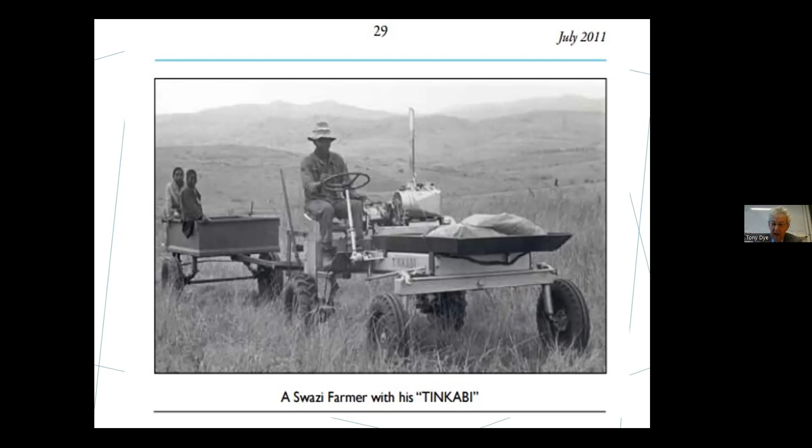Yes, okay. That's the two-cylinder air-cooled diesel engine from Kirloskar in India. It produces about 15, 16 kilowatts. But what I thought of it at the time was, well, it's a massive lump of steel and technology. Is there possibly a simpler way in which you could produce 15 kilowatts to power mechanization of small farms throughout the third world? And I started thinking in terms of three-dimensional shapes.

And what I came up with, you may be able to see on this screen, through the transparent wall, you can see two rotors, a two-lobed rotor on the left and a three-pocketed rotor on the right, so that the lobes and the pockets can interact. And the two shafts are geared together with timing gears that preserve the correct angular relationship between them.

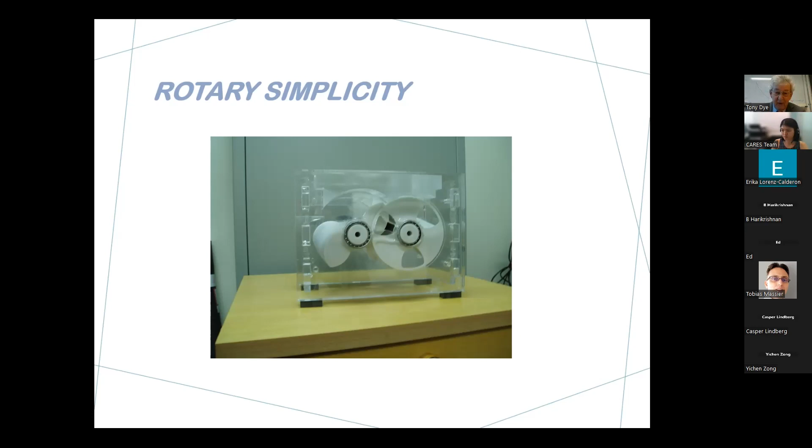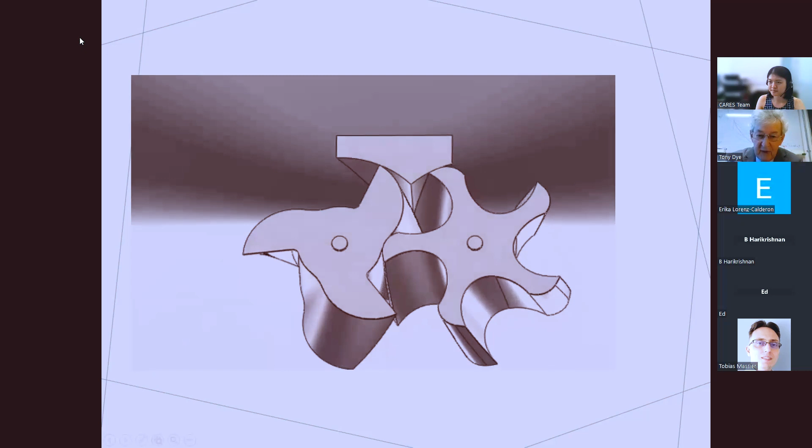And what I will show you now is the means by which compression and expansion are achieved with this type of device. It's a complete compression cycle. And here's the second one now starting to operate. You have to imagine these rotors are mounted in the housing with close-fitting walls at front and rear, but not actually making contact with those walls. So the rotors are able to rotate without making contact, and therefore the compression takes place without any internal mechanical friction. So that demonstrates compression.

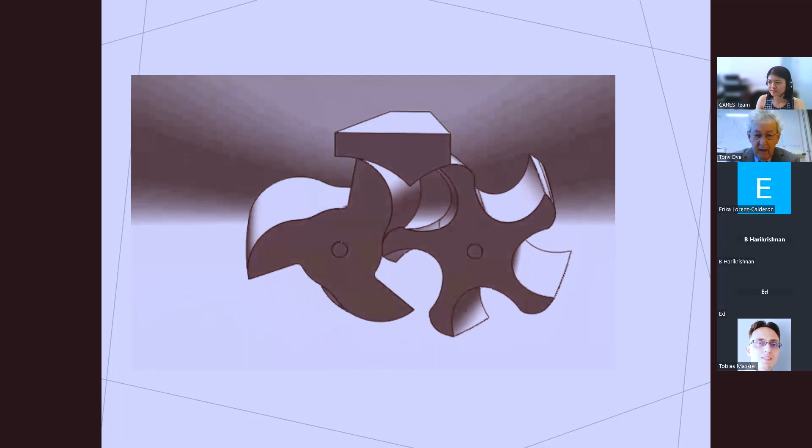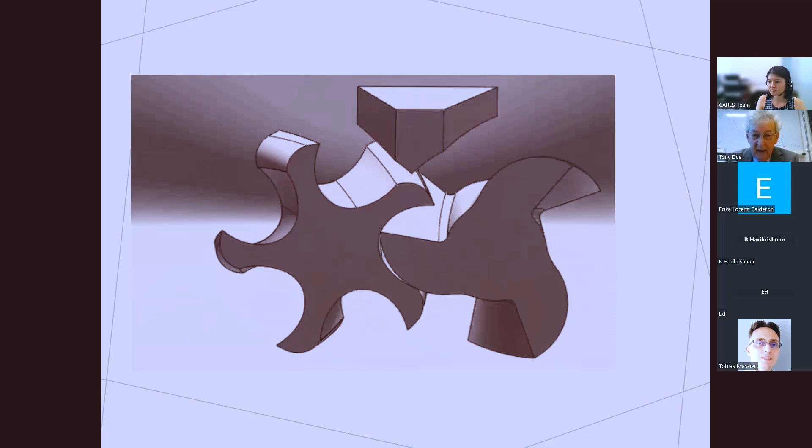Of course, I can't show you the porting that allows the delivery of the compressed air to whatever receiver is available, and how the air would get into the housing which houses both the rotors. So what they're doing really is just swimming in working fluid. If I can, I might be able to rotate it backwards so you can see the effect of expansion. Let's see if we can do that. No, we're not able to do that. Anyway,

if you can imagine it, the process is exactly the reverse of what you've just seen. As the rotors counter-rotate, a small new transient chamber is formed, which expands as the rotors counter-rotate. And one can look at a very high expansion ratio. We think in terms of 400 to 1 for quite a small size of machine.

Can we just go back one? Yep. Oh, yep, no problem. Right.

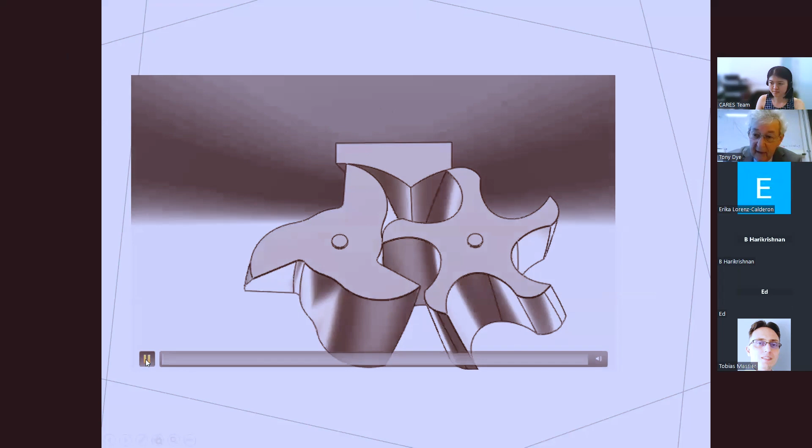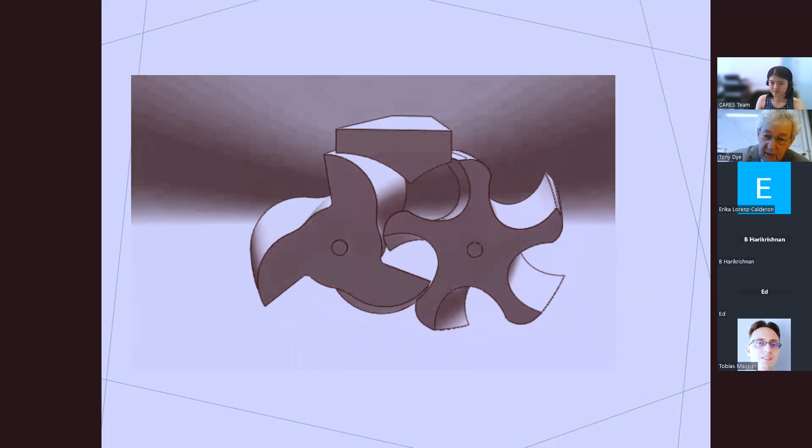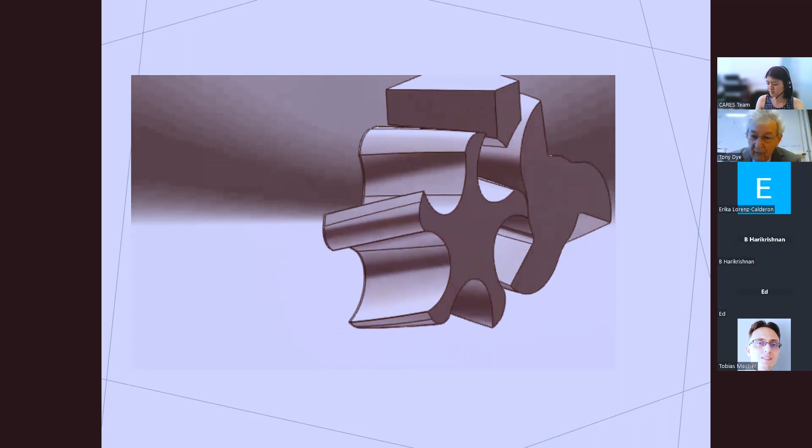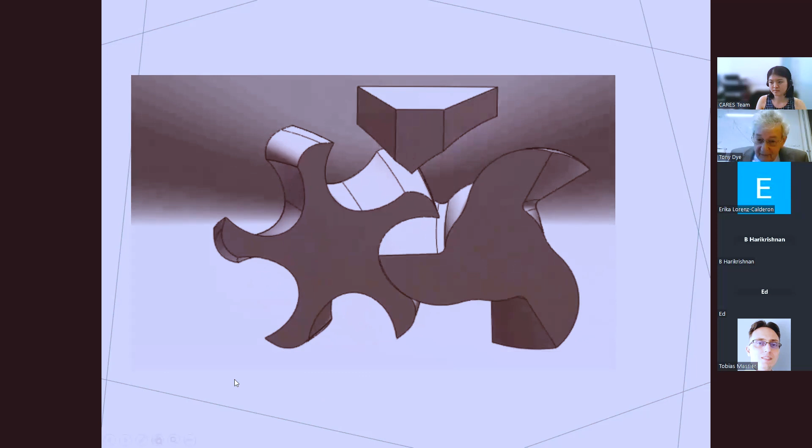At this stage, this was just a concept, and I realized that you could have two devices, one compressor and one expander with connection on the same shafts, put a combustion system between the two, and you would have an internal combustion engine with potentially world-beating characteristics. So at that point, I realized I could do nothing because I had no funding and I had no patent protection. So I couldn't even talk to anybody about this.

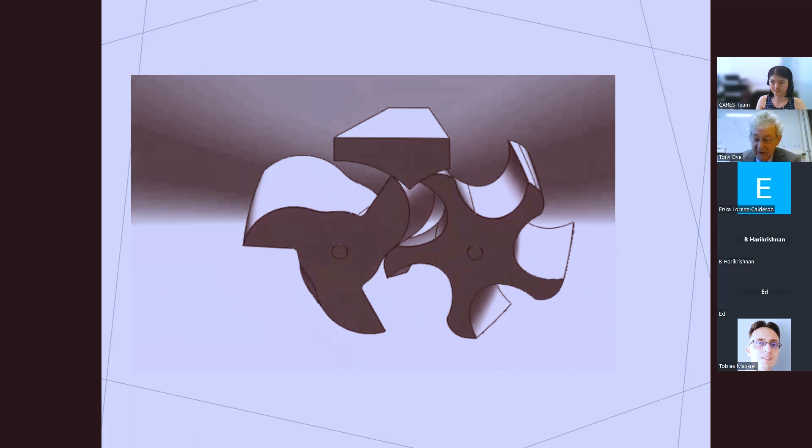So what I then did was to turn my attention to the auto industry. I thought if I could learn something about how the auto industry works and how it might be possible to introduce technology into it. Okay, so I'd like to move on now.

Could we move to the next screen? Okay, whoops.

What I did was I got a Ford Anglia car, heavily modified the engine to run on 2 cylinders instead of 4, and used the 2 center cylinders for double expansion, and to recover the heat from the exhaust and introduce it as superheated water.

And I took this car down to my friend in Wiltshire, where I'd done my practical work on the farm, and he gave it a test on the road, came back and said, yes, you know what you're talking about, I'll fund you. And the result was that I then had a dynamometer, an engine dynamometer, so I could do engine testing, and some electronic equipment to monitor cylinder pressures.

The idea of recapturing the exhaust heat was not easy to actually turn into practical use. But I then discovered a process that was happening in conventional gasoline-powered engines known as intercyclic combustion variation. You've probably ridden in a petrol engine car, and if you're driving along at 60 miles an hour on a level road, every other time the pistons go up and down you're going to get a combustion event, and the pressure will shoot up to a maximum and come down again.

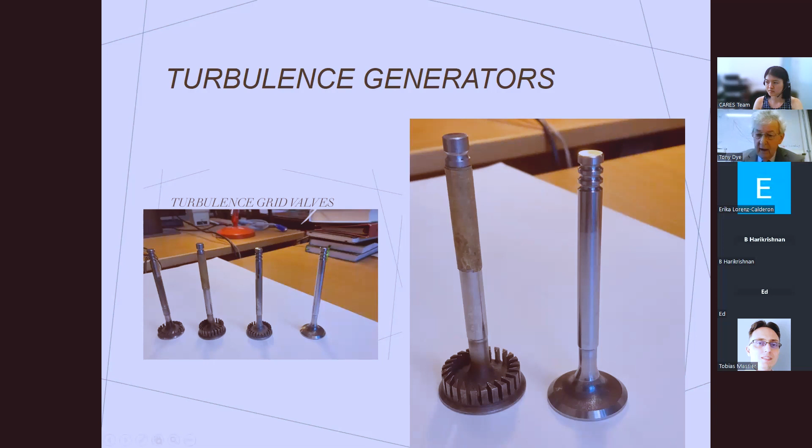And engineers had been trying to fit functions to this to define, well, what is it that's causing it? There must be, no, there's no function at all that fits. It's a completely random walk. And that's because it's caused by turbulence. And if you don't control the turbulence, then you don't have very good control of combustion.

What I then was able to do was to work with Ricardo's, the consulting engineers to the auto industry. They liked this and set up a test. They bought a car, drove it for 1,000 miles, put it through the test rig, and threw the book at it. And they said, right, we've got everything that we need to know about the performance of this engine. Come and put your modified cylinder head on it, and we rerun it.

And when they reran it, they said at the end, well, you've got 20% reduction in fuel consumption. You've lost some power, but it still has the same power as the 2-liter version of this 2.5-liter engine. So it's virtually adaptable. And you've got emissions like we've never seen before. And we were able to show that it's possible to lean the fuel-air mixture to a point where there's no further nitrogen oxide emissions formed.

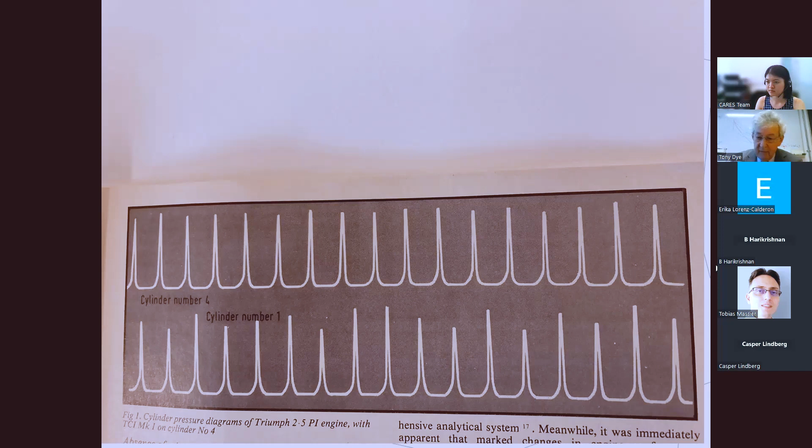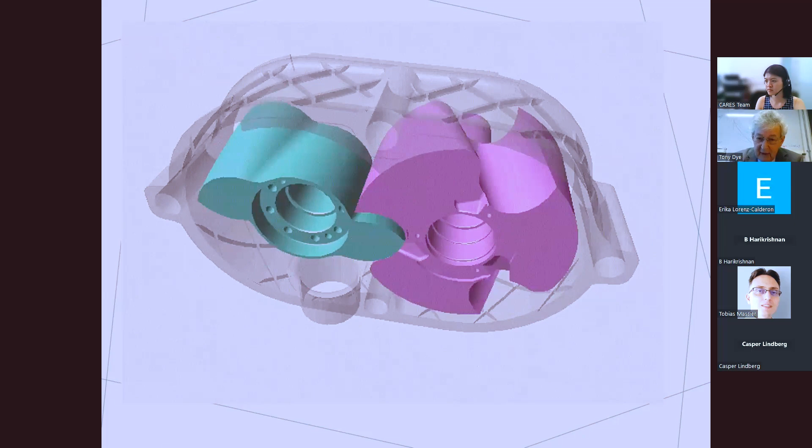Oh yes. What we did was first to build a compressor, and this was able to attract the attention of two successful entrepreneurs from Belgium, Karel Bos and Ton Coat, and they funded the development with eventually £2.5 million to build an engine. They wanted to see a new IC engine, and that is what we did. We built the engine.

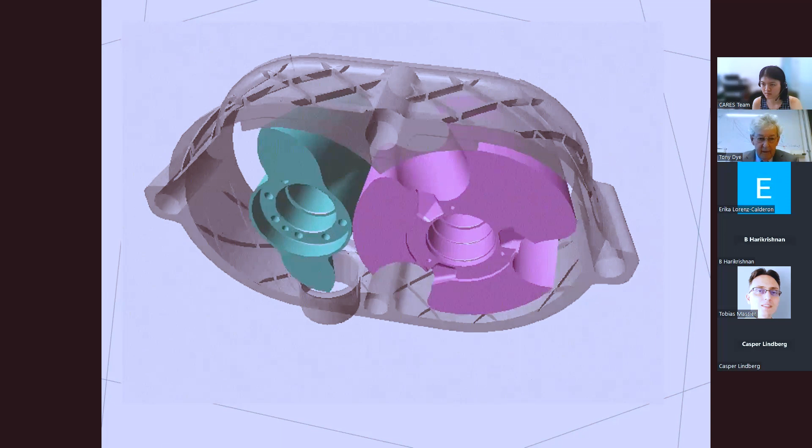I can't get it to move on. Can we move it on? Yeah, whoops, too far. That's it.

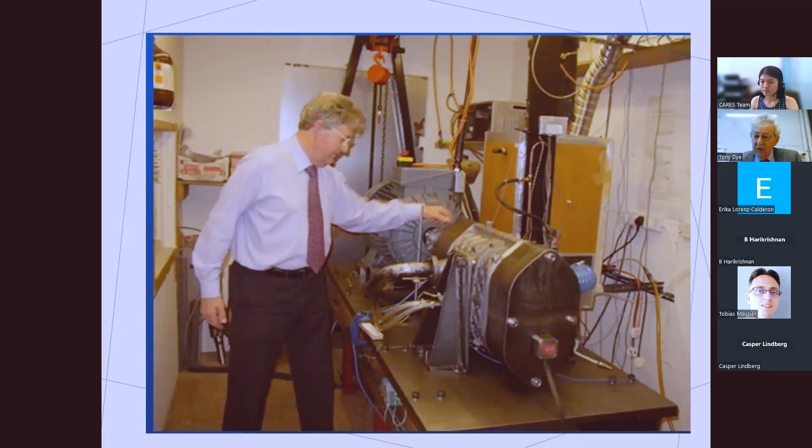Here is the engine which we built, and it's on its test rig in our facility, which was then a small unit on an industrial estate. And you see that within this casing here, you have the gear wheels at this end, which time the rotors. The compressor is on this side. The combustion system is in the center, and there's access to the spark plugs on the other side. You can't see that. And behind is the expander with the exhaust pipe coming out here. And what's going on inside here is shown on the next slide.

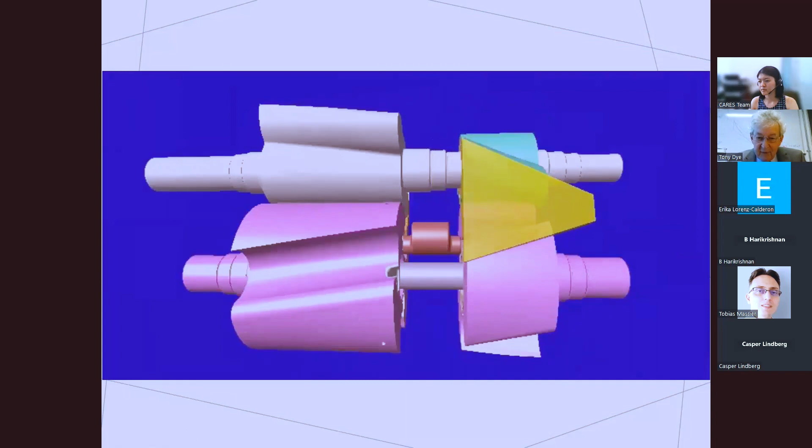Now, can we animate this one? Yes, we can. And now you're looking at the compressor end. So the compressor rotors are delivering compressed air into the chamber, which is the brown cylinder in the center there between the two sets of rotors. And the expansion takes place in the expansion rotors here. And you'll see they're twice as long as the compression rotors, because when you combust a fuel air mixture, it wants to expand by twice its original volume.

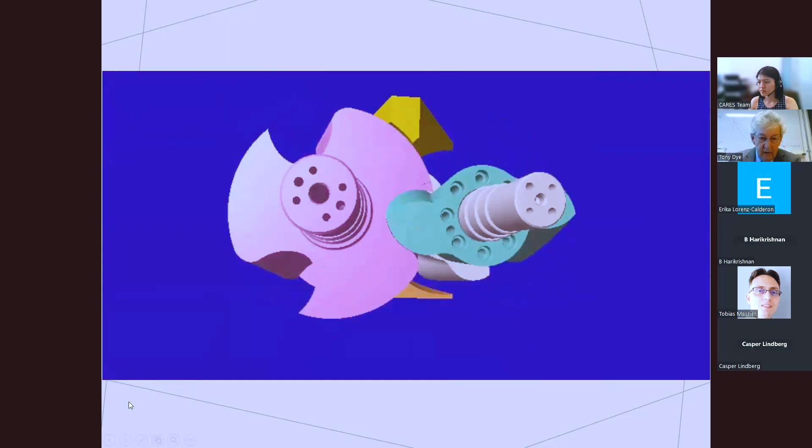Right. So let's not go on. Can we go back? Right, let's just hold it there for a moment.

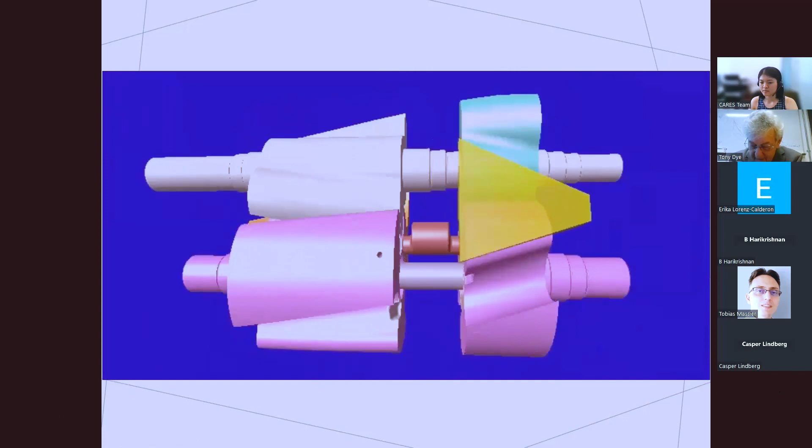What we were able to do then was to demonstrate this engine to Rolls-Royce and General Electric. We're now talking in 2003. We started contact with those two organizations, and they were at first ecstatic. I mean, we had to kind of scrape them off the ceilings and get their feet on the floor to start sensible discussions. And the discussions and negotiations then went on for a year. And they were saying, look, Tony, you've shown us the most efficient and effective way to convert fuel energy to shaft power that we have yet seen. And they didn't have any doubt about that.

But at the end of a year of discussions, they were both saying the same thing to me, which was like, Tony, nobody but nobody is going to build your engine. And it's not because we don't believe it. It does what it says on the can. It will achieve what you're looking for. But it would also destroy Rolls-Royce. And I don't know what it would do to General Electric.

What they then said was, look, you've got the best way to compress gases, including air, of course. Air is a gas, yes. To compress and expand, you have the best way of doing it, with no internal friction, mechanical friction, and opportunity for very efficient compression and expansion. What you've got to do then is to look for an application where you don't immediately get into industrial disruption on a massive scale.

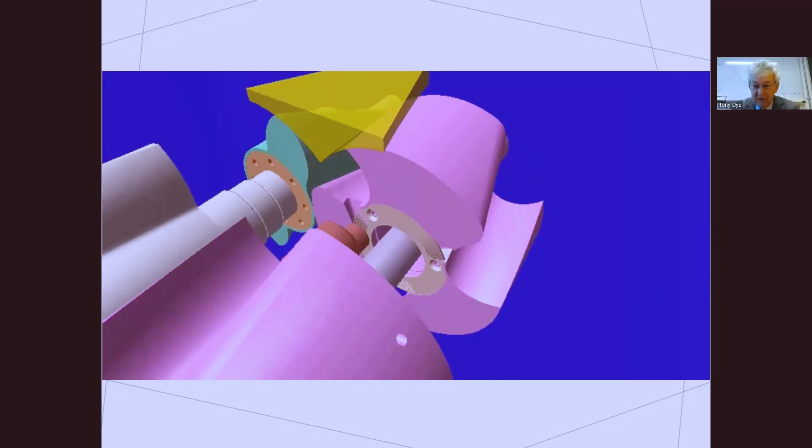So I worked for a few years with Valeo, the French company. We designed a compressor for supercharging their downsized petrol engine, which very nearly went into production. But just as it was about to do that, I received the invitation, this was then 2014, to visit Highview

Power. Highview Power was a spin-out from Leeds University, where there was a cryogenics laboratory, and they had been experimenting with liquid air and realized that it takes a lot of energy to make liquid air. So therefore, it could be used as an energy storage medium. And their first plant was demonstrating the process on an industrial estate at Slough. And I was invited down to visit, and when I saw it, I very quickly realized this is the opportunity that we have.

Highview had decided to commercialize this technology and use for compression and expansion, and it is really only compression and expansion of air, turbo machinery, which had the advantage for them that they realized they were introducing to industry a new technology, and one with which industrialists were pretty well unfamiliar.

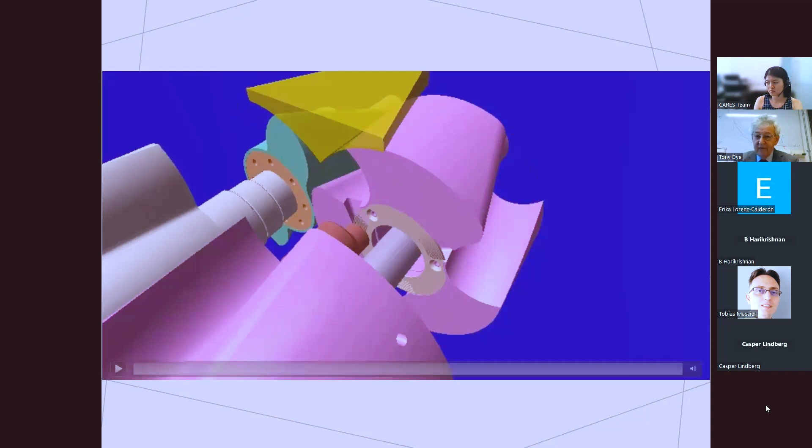Let's see if we can move on. So what we had to do was to first design a system for delivering liquid air. And the way we did it was, as you've seen on the screen. Can you see this? Yes. Okay.

So we have power input on the left-hand side of the screen with four electric motors driving 4 power lines, each of them having a direct drive to successively 3 compressors. The first stage compressor takes the air up to about 4.5 bar. It then goes through a heat exchanger because we want to recover the heat. The heat there is at about 450 degrees K.

So the heat is stored, and the charge then goes to the second stage compressor, which will also go up by about 4 times to 20 bar. Again, heat exchange, and third stage, another 4 times, takes you up to 80 bar. So the object is to get compression of air up to 80 bar.

And then what you've to realize is that the lower 3 power lines are required in order to provide the cooling for the fourth charge, which is in the number 1 power line. So what you do is to put the air at 80 bar and ambient temperature through an expander down to ambient pressure. The cooling is subsequently through heat exchangers submitted to the air which is compressed from number 1 power

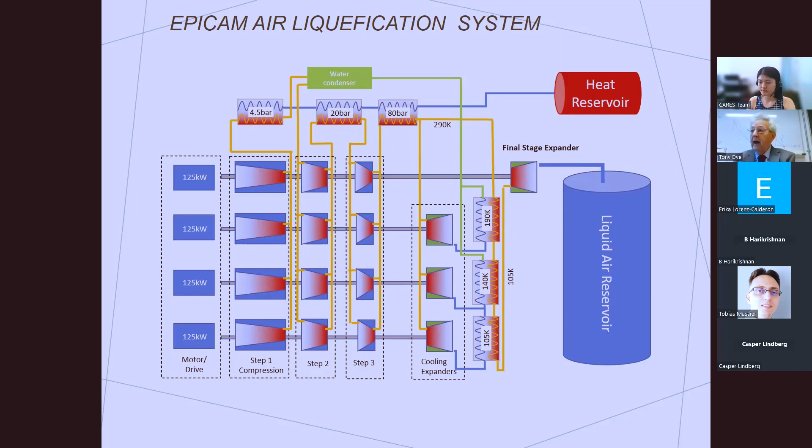and we then go on to expand it. And I have to apologize for the rudimentary nature of this diagram, but at least it illustrates the elements. So we have 2 energy storage elements. One is the cold one at 75 degrees K, and the other is the hot one at about 450 degrees K. The cold liquid air from the reservoir is introduced into a small bore pipe, which is assisted with a high pressure pump through heat exchangers to an injector in the expansion engine.

So what it means is that as the liquid air passes through this system, its temperature rises, and it tries to boil, but of course it can't, because the end of the pipe is closed by the injector, and so its pressure rises. And as its pressure rises to about 30 bar pressure and 170 degrees K, it will then phase change to gas. So it then becomes a supercritical gas with the same density as the liquid air from which it was derived.

And it's that supercritical gas which is then injected into the expansion rotors of the rotary engine, the new rotary expander engine. That then produces shaft power, which is used to drive a generator and produce the power which is then supplied back to the grid.

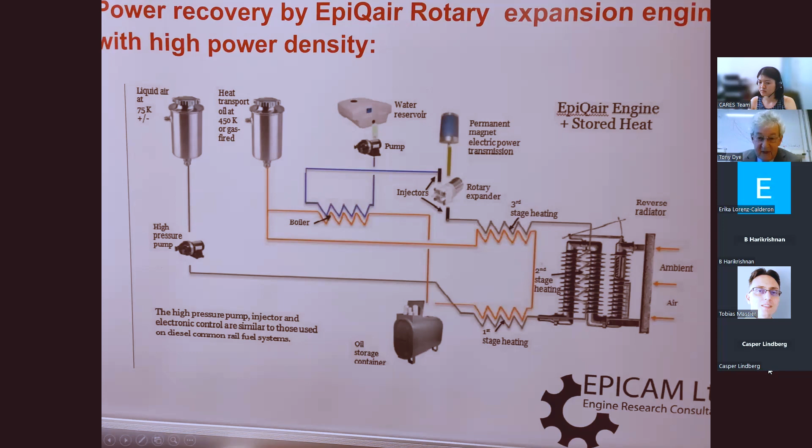So that gives you a sort of summary of the system that we proposed. Can we go on to the next slide?

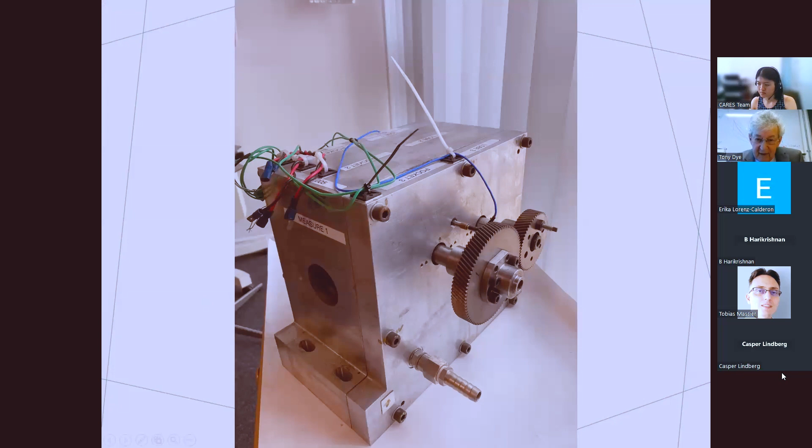Here you see a prototype engine with its rotors, and it's an expansion engine with injectors on the rear side. That's shown on the next slide. The injectors are in here, and they're delivering this supercritical air, ideally, into the rotors and producing power. We weren't, of course, able to build the liquefaction system in advance, so we just used nitrogen gas to prove the concept.

So now you see the whole system really is 3 modules: compression module, in which air is reduced to its minimum volume, maximum density as liquid. It's stored, the heat is extracted for storage also, and then the stored energy can be recombined in a heat engine, as you've seen, to regenerate the electricity.

We have carried out an exercise in cooperation with a high-level team at Imperial College. They have studied this complete system, constructed a thermodynamic model for the system, and concluded that when built and connected to a power grid, the system will deliver energy storage to the grid with a round-trip efficiency of approximately 68%.